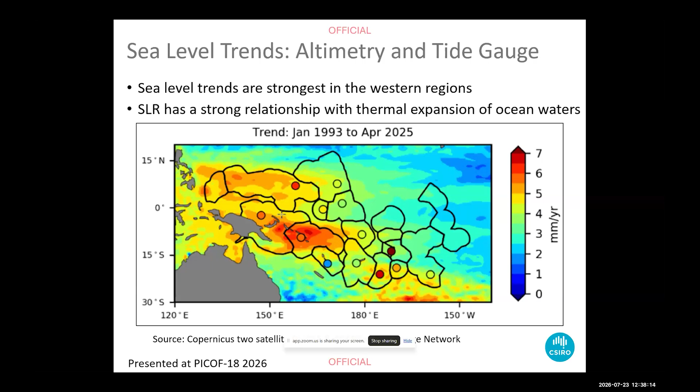So this plot shows the trend from 1993 through to 2025. The dark boundary layers are each country's exclusive economic zones. The shaded map in the background shows the altimetry, and the dots within each of these EEZs show the tide gauge recording. The red colour indicates the highest rate of sea level rise in millimetres per year across this time frame. You'll see in some of the countries, the tide gauge is measuring a different rate than what the satellite is measuring, and I'll explain that in the next slide.

One of the factors you need to consider in the Pacific is not all the land is vertically stable. Some is moving up or some is moving down. You can see where the tide gauge and altimetry do align, for example, the Marshall Islands at the top, it's because the land is stable. It hasn't moved up and down overall over that period of time, 1993 to 2025.

If you look at Samoa, however, there's been a big vertical downward shift in Samoa, which has exacerbated the sea level rise. And in contrast, Vanuatu has been moving up, and that has made the sea level rise appear less by their tide gauge. So when you're looking at sea level rise in the Pacific, it's good to consider all sorts of things that will affect how much the sea may impact on the land.

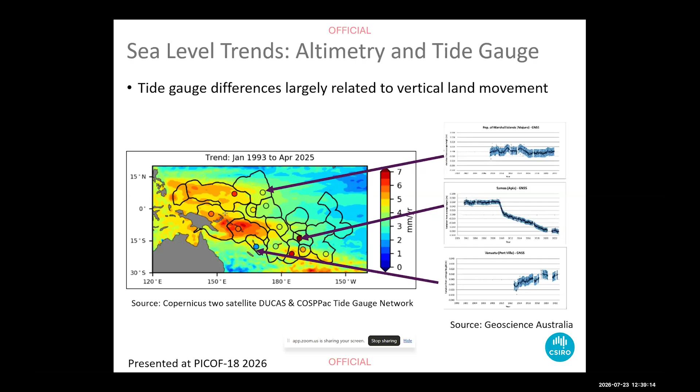Looking into the future, we've got to consider some uncertainties. There's three sources of uncertainty. The first being the future greenhouse gas and aerosol pathways, which could range from low right through to high. There's also the regional climate responses, or the model responses to these pathways, some models being more sensitive to the change in composition of the atmosphere than others. And ongoing natural climate variability will occur into the future, so that is also considered in the future modelling of sea level projections.

All right, so I'm introducing here these elements called shared socioeconomic pathways, known as SSPs. You can see the high SSP5-8.5 follows this faster increasing rate of CO2. With SSP1-2.6, we call a low scenario, there's a decline in greenhouse gas concentrations into the future.

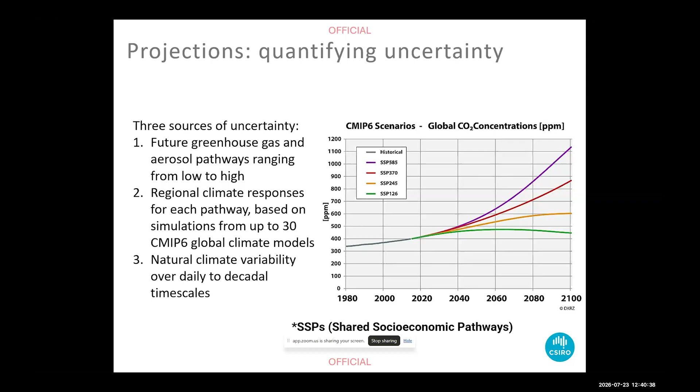So remember these, because in all of the follow-up, I'm going to be discussing SSPs. So the high is 585, the low is 126. Oh, 226 in this case.

So this here shows the IPCC projections of global sea level rise out to the year 2100. And here you can see two pathways out into the future. The pink band shows the SSP 585 trajectory of sea level rise in centimetres, right? So you can see for 585, depending on the model, which shows that range of the pink coloration, it could be up to or more than a metre globally into the future, but the median showing around about 80 centimetres. That's the median of all the models.

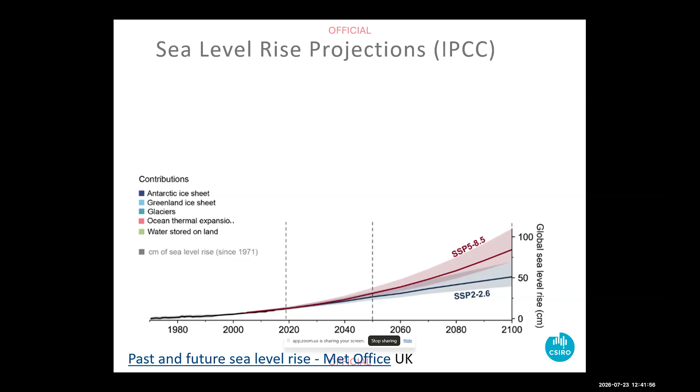Whereas the lower trajectory of greenhouse gases, of course, causes lower sea level rise into the future. Now, what contributes to sea level rise is a lot of factors, including both Antarctic and Greenland ice sheet melting, glaciers melting, thermal expansion of the oceans, and also water stored on land coming out of the land and into the sea. And here you can see the contributions for the different timeframes, including the current timeframe, and which of these factors contributes most to the sea level rises.

And what you'll see is the largest contribution is from thermal expansion of the ocean. So that means that seas are getting warmer, and that causes sea levels to rise. But there are other contributions. So you can see that overall, the main contribution, no matter which trajectory or which time frame, is the thermal expansion. But notice by 2050, the scenario doesn't matter too much. You can see even in the median of the scenario, sea level rises. There's not a big difference. It's the difference in scenario that matters a lot by the end of the century, where of course the higher emissions has much greater impact.

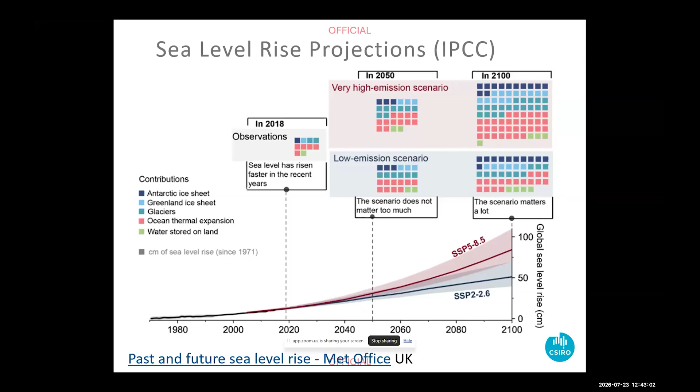All right. The other point I'd like to make is that the rise in sea level is not like bath water. It's not even everywhere. There's some parts of the globe, and this comes from the IPCC Interactive Atlas. Anyone can go into this atlas and have a look. All right. Here I've selected a reasonably high SSP. So we'll consider the high SSP, 3-7.0 rather than 8.5. And this is by the end of the century, but you can have a look at all stages into the future if you wish to explore this sort of information.

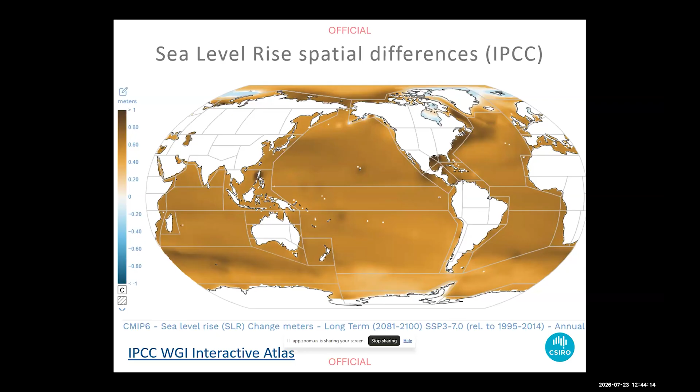But notice that some parts of the globe tend to have a much higher level of sea level rise by the end of the century than other parts. Okay, it's quite a dynamic science that does these estimations. If you like to make an eyeball average, you could probably say that the Pacific region tends to be in that average of the whole global sea level rise outlook. But there is another tool, a really interesting tool that has been developed by NASA. And this actually doesn't measure sea level rise, it measures sea level change because it factors in the vertical land movement. So it's quite a helpful tool.

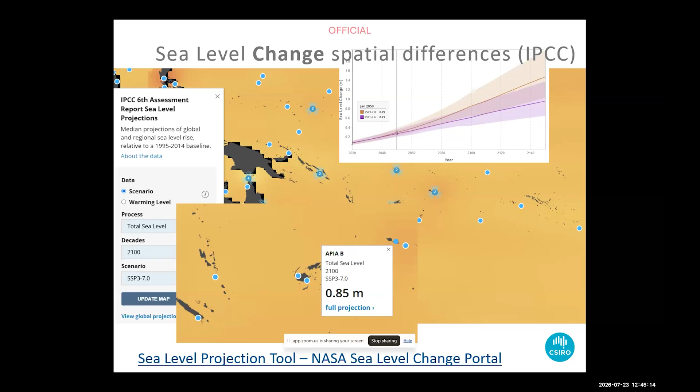And what you can do if you're in the Pacific or anywhere in the globe, you can actually click on any of these dots. For example, I've picked Samoa here. And you can get the full projection of sea level in this kind of time frame. Here I've just picked the low and the high emission scenarios. This data is also available tabulated, so any engineers can grab this data. And here I've dialed to January 2050. These are the different median results. So it's quite an interesting tool to use, especially for engineers, I think.

This low confidence is what people might be talking about when they talk about the climate change tipping points. For example, things happen with Antarctic ice sheets faster than expected, and that is factored into these scenarios. It's low confidence because the science is still evolving in looking at ice sheets and how they will evolve into the future. But it's sometimes a factor that engineers might have to consider when they're planning and designing, especially some very long-lived assets. So it's something that you can consider, but something you have to consider with a bit of caution.

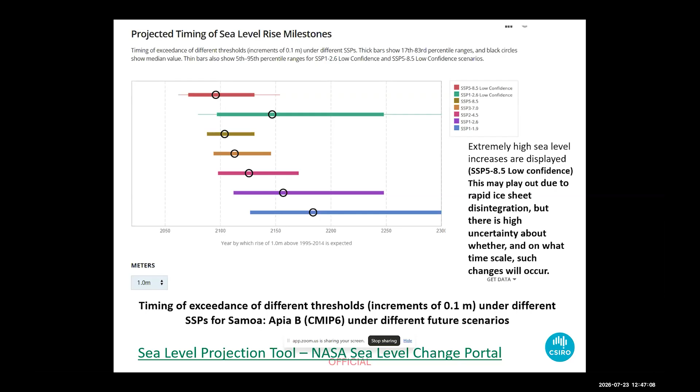Okay. So let's talk about extreme sea levels. That was just sea levels, all right? But what causes extreme levels is there's also other contributions, and engineers would definitely take this into account. For example, tides, the interannual sea level variability, and ENSO is a big factor in the Pacific because that's exactly where that warm water is shifting around. So where the warm water shifts in these ENSO phases has, of course, got higher sea levels. All right, so that's a factor.

There's also storm surge and then the waves that occur, for example, with tropical cyclones, right? And also coastlines and the run up and the shape of these coasts are also important to consider. Noting that, as people will probably be aware, not all extreme sea levels occur, because, for example, a tropical cyclone might occur just by chance when it's not high tide. So while there's a TC, maybe that doesn't cause an extreme sea level event.

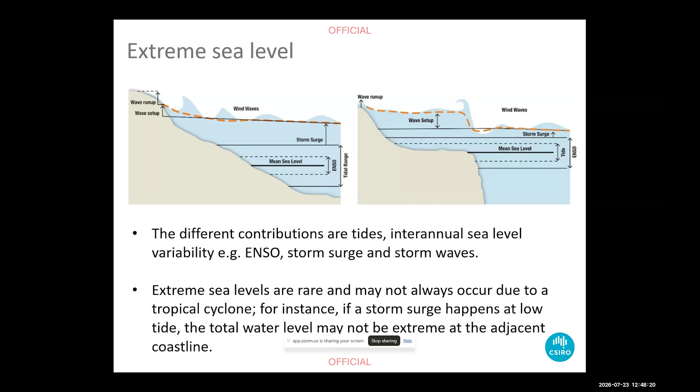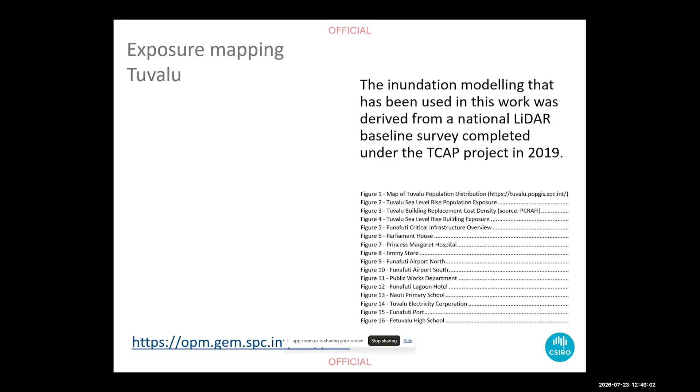Just a couple of examples to finish. We recently did some work in Tuvalu, which is very exposed to sea level rise given its low-lying nature. Here in this Tuvalu work, there's been some inundation modelling undertaken by the TCAP project. You can see on this there's a web link for that where you can get some information. That was the LiDAR modelling, but we developed that further and had a look at different things like population exposure, the cost of different exposures at different times, and also picked out a few important buildings in Tuvalu. And here's an example of the Parliament House. You see in that list there's all sorts of buildings that we've done this kind of modelling for.

I think people might be familiar with return periods. What return periods means is how frequently an event will occur. So if it's a 5-year return period, that means it's reasonably frequent. These kind of events occur every 5 years. Compared to, for example, a 100-year return period, they're rarer. They only occur about once every 100 years statistically.

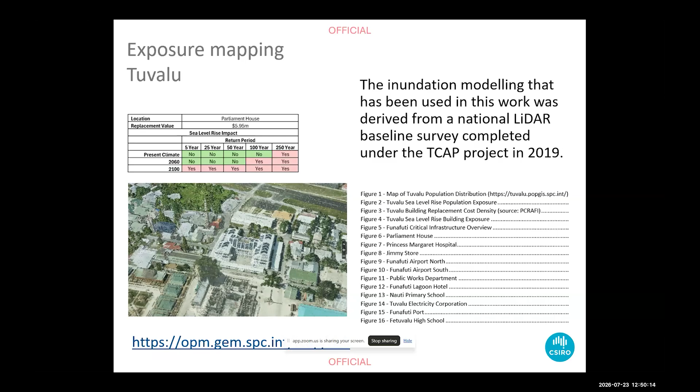And you can see here, for example, this Parliament House: in the current climate, storms that occur once every 5 years will not impact Parliament House. But by the end of the century, even the 5-year return periods will impact Parliament House. So we would consider that well exposed at the end of the century. And this is under the middle SSP2-4.5 scenario. This sort of work's being done all the time in many of the Pacific Island countries.

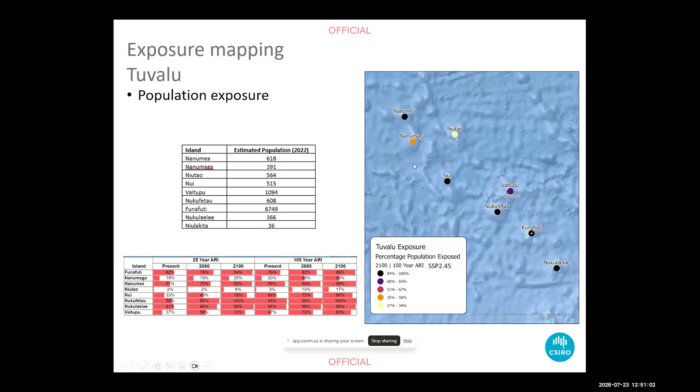This is also for Tuvalu showing population exposure on different islands in the archipelago. You can see all the different islands, this is SSP2-4.5, by the end of the century, this column, the 1 in 100-year return interval. So by the end of the century, under middle climate emissions, some islands in Tuvalu are more exposed than others. Niutao, I don't know how to pronounce that, is less exposed, for example, than other islands in that chain of islands making up Tuvalu.

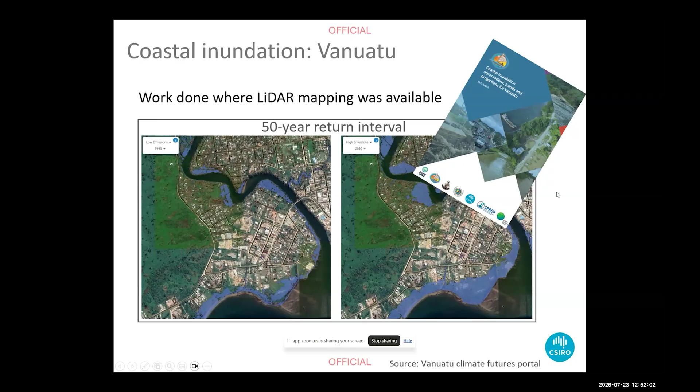Another really interesting project undertaken recently in Vanuatu is some LiDAR mapping that shows exposure of roads in Vanuatu. In this space, frequency of storms is how we describe how dangerous they are. So this is a 1 in 50-year storm, and how and where it will inundate the coast under current climate versus high emissions by the end of the century. This kind of mapping is now being developed for Vanuatu, and they're using it to start planning their roads for the future. All of these have been reported in some really accessible documents available on the Vanuatu Climate Futures portal. Thank you very much.

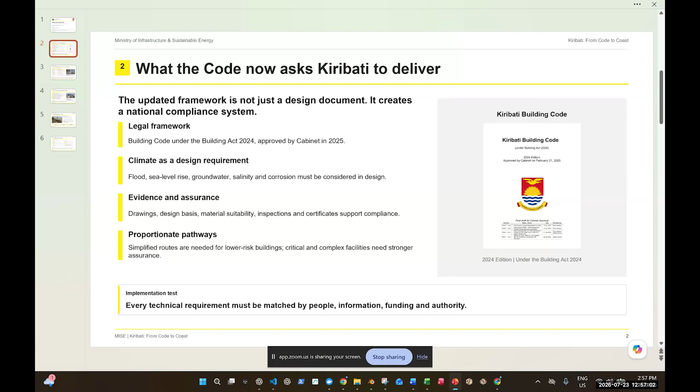Like I said, when you're working in the international development space, the governments, the local construction market, the local engineers, there's a heavy dependence on experts coming in to deliver the work. So the quality of the work has to happen. And if it's not there, we don't get the quality outcomes. We don't have properly built seawalls, bridges, roads. We're looking at baseline data such as flood levels, and structural designs as well. There's a heavy reliance on international development partners to supply that.

Currently in our ministry, there's a limited number of certified practicing engineers or fully qualified experts who can support. So that dependency once again hinges on what development partners can provide, and that ultimately also affects sustainability. It comes back to the reliance on international development partners.

Material suitability in Kiribati is a massive thing for us. One of the key challenges we have on the ground to build sustainable infrastructure is aggregate. I know there are studies that have been done around aggregate. We have one company here that provides it. However, there's a high salt content in there.

And so when you're going to mix it with concrete and applying it on the site, it doesn't last. We have one classic example in one of the towns, Bairiki. The building was built, however, it wasn't monitored properly. It was a three-story building that ANZ were in. Now, because of the salt, the corrosion on the steel, it's no longer viable. People, they've all moved out.

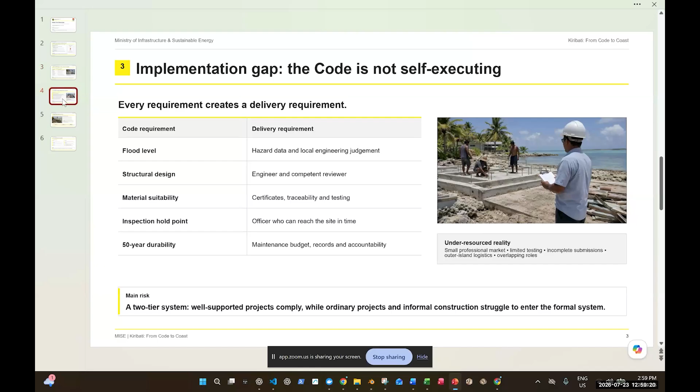The cost and feasibility, once again, there's a heavy reliance on us to actually go find funding. So we'll have these designs that we really need. For example, solid causeways. However, once again, it comes back to aggregate. We need to import most of the materials, probably 90%. If you think about where our material costs come from, it comes from Australia, New Zealand, it's already at a high price. Then we have to pay for shipping, pay for import costs as well, clearance costs. So it all starts to add up.

This is exacerbated when we have to go to an outer island. So the first port has to come to South Tarawa. If we've got a project in, say, Butaritari or another outer island, there are further costs that are involved where we've got to ship it over there. And so you can see that building quality starts to build up the price. And so for a government, it's not feasible to deliver. Hence, again, the heavy reliance on international development partners and trying to make it work.

When you're forced to build under these conditions, it is a challenge and a half. And every day we battle these things to try and figure out what's best, what do we drop off, how do we slowly change the hearts and the minds of the people to understand that we are trying to build something quality whilst making it affordable.

One of the key things that I forgot to mention earlier was our Building Act specifically states that the Act and the Code only applies to South Tarawa and Christmas Island, for the sheer fact that that's the massive economic hub. And that's where a lot of the companies and people, that's where the money's at, so they can afford it. All the outer islands don't rely on that. However, there are some plans in place to implement building manuals to support the outer islands that don't fall under the Act.

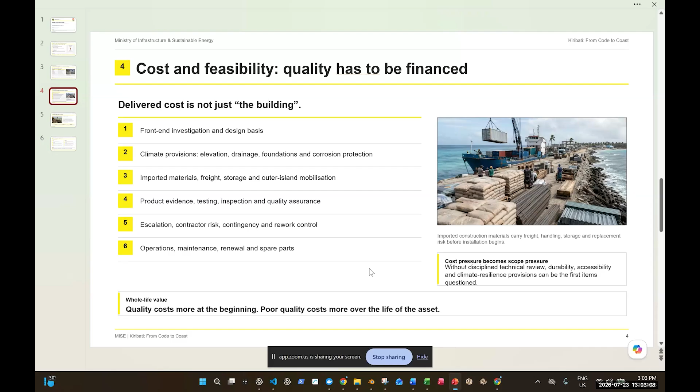Then the next question we get back is, all right, do you guys have a maintenance plan for the bridge? Do you have a maintenance plan for the causeway? Do you have sinking funds allocated? Is there a policy or a financial policy that allows for this to happen? And the answer is no, we're working on it. So trying to catch up while delivering quality infrastructure is one of our challenges there.

A couple more slides, won't be too much longer.

So generic standards is not enough. The resilience is in the details. One of the key things we have is if we've got the science telling us that we need to build higher or change the way we do things, the code comes into place, but it's not the code that actually builds, it's people. And one of the key things is engineering on the coast, like looking at these elements here.

Yeah, they're all from the code, but having the team that have the expertise, experience, having contractors that have the experience and the financial capacity to meet those demands is difficult to find here in Kiribati, and I dare say in a lot of other small island developing states. Our processes internally to ensure that they're fit for purpose also have an impact. We have a team on the ground who are learning, they're great, but experience once again is limited, and having the capacity to go out and inspect, to have them understand what they're looking at is a challenge.

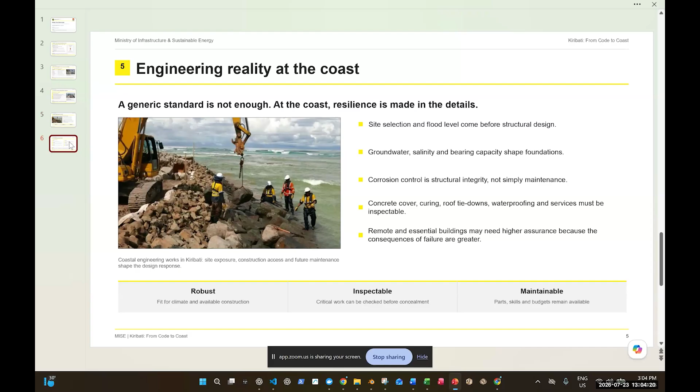So there's some good news, don't worry, I'll come back with that one. So my last slide I'll share is just from publication to protection. Looking to clarify the roles internally. So how are we going to shape this? Clarifying what each department has to do, what each ministry has to do. We're currently finding our feet. There are laws in place, there are role delineation policies and whatnot, but it's still unclear.

And that sort of confusion internally affects how contractors engage with our ministry, how they engage with other ministries. Like a lot of Pacific Island countries I've worked in, it's not a straightforward build. You have to go through multiple ministries, through different sub-departments to try and get the job done. And it can be a challenge when it's not clear.

We're looking at simplifying it by using the building manuals. PRIF and World Bank are fortunate enough to be funding that next phase of our implementation plan. So we'll be doing building manuals for the outer islands, but trying to incorporate and teaching families that, hey, this here is to ensure that your buildings, your homes will last longer. You know, at the end of the day, it's their choice. How do we convince them that that's better for them?

When, you know, the cost may be, say, 100K versus, oh, they can do it with local cheap materials for like 20K. And so these are some of the considerations you have to make when we're talking about policy. When you're trying to implement the code, that cultural currency is vital, because we can talk about policy, we can talk about the science behind things till we're blue in the face. But in the Pacific, there's a very, very important factor, and that is cultural currency, because if you do not know how to navigate that, it'll be difficult for you to affect positive change.

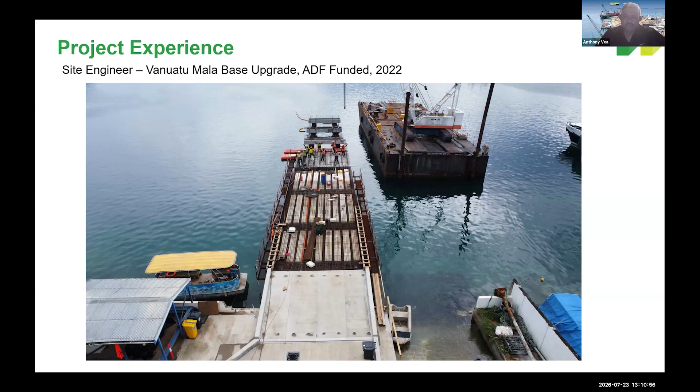After my little stint in Vanuatu, I moved on to the Queen Salote Wharf upgrade as a site engineer, going to senior site engineer. This one was a personal one for me, having been from Tonga originally and then moving to study in New Zealand and then being able to make my way back to build this modernized, resilient structure that's basically Tonga's lifeline, responsible for over 90% of Tonga's imports and exports, was a true blessing.

It's also a key evacuation route out of the main town area over to the bush areas, which are higher in elevation. It's quite funny on this. I believe the reason this was fast-tracked was because in the 2022 tsunami evacuation, the prime minister at the time was stuck in traffic trying to leave town. Just why I believe we are building this right now.

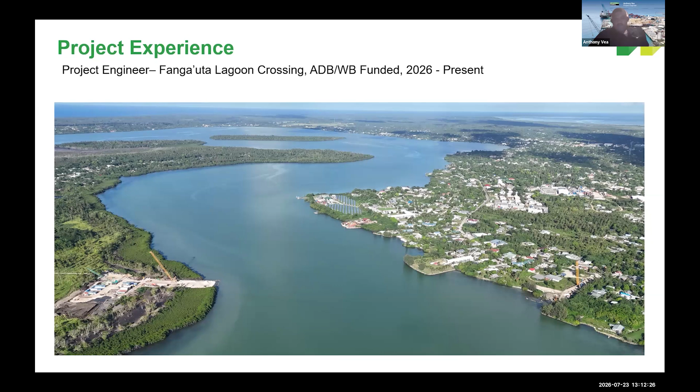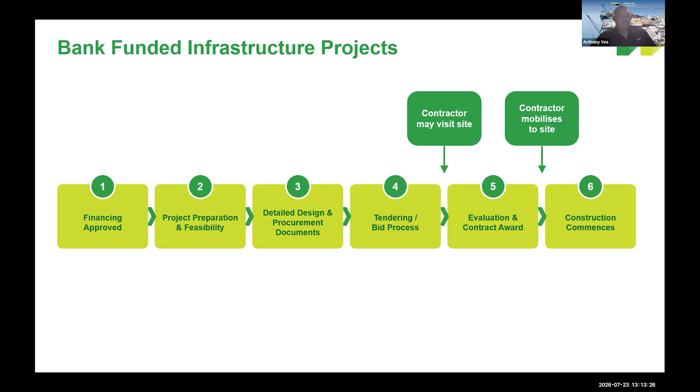And then finally, construction commences, the contractor mobilizes to site. I just bring this up because you see later on in the stage is when the contractors come to site and when delivery is required. So there are issues that we have to deal with very quickly.

Design solution to deal with sea level rise. I think everyone knows we just make taller structures. Sea level rises, make taller structures. The points I want to discuss today from the contractor's point of view is the survey control. So sea level rise results in an increase in mean sea level. How is this translated to the country's survey control?

Tie-in, confirm on site. Probably a contractor's least favorite thing to see on the drawing is a statement that says confirm on site, because it means that there are some design elements that haven't been finalized yet. So we need to confirm it on site when we're there working together with the designer. So when you design all new structures to be higher in elevation to account for the sea level rise, you have to tie it into existing structures because there are limits financially to how much you can build in a project. And then the height versus cost scenario.

So the cost of building structures taller increases due to the methodology required to construct. So if you have a design life of a wharf that's say 25 years, you have to deal with an incremental rise in sea level. Whereas if you deal with a design that's 100 years design life, then you have to deal with a larger sea level rise, which means you'll likely be designing a taller structure.

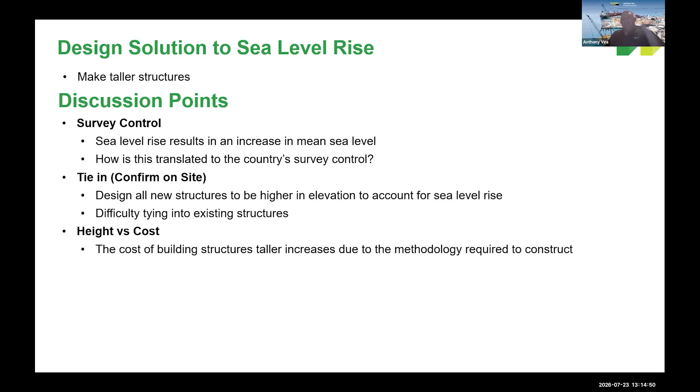So, survey control. This TON1 benchmark is a control point just south of the Queen Salote Wharf, which we used on the project as the main benchmark for our survey works. This TON1 benchmark isn't just a local benchmark, it's actually part of the wider Pacific Sea Level Monitoring Network and has immense value for sea level climate change worldwide. Our elevation was based on MSL, so mean sea level. So a 0-meter MSL meant that that was mean sea level at that time.

We moved on to the Fanga'uta Lagoon crossing, and we received this tide table as part of the design documents, which reference a different datum, tide gauge 0. It had a different mean sea level value, 1.042 meters. So after dealing with all of this at Queen Salote and then coming to deal with this at Fanga'uta Lagoon Bridge, we decided it would be best to translate this datum here to the TON1, which is a significant benchmark that's used all over the South Pacific.

What we learned from this translation is that there was a 92 mil difference in mean sea level from the Fanga'uta Lagoon crossing tide levels and the Queen Salote tide levels. So we made an adjustment and went with a more conservative approach, which resulted in a 92 mil increase in all elevations, including the bridge and roads, which could add significant costs to a project. So with all the value engineering proposals, we worked together with designers and the government of Tonga to come up with a solution that works.

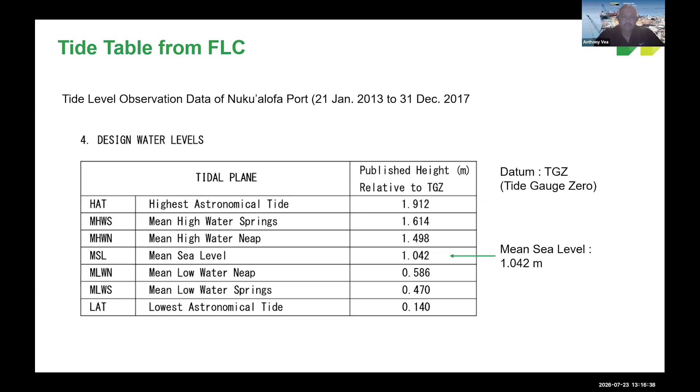Next, as I mentioned, the tie-in and confirm on-site scenario. So this is the Queen Salote Wharf, which we had just worked on. Down on the southern side of the wharf is this red line, which is the extent of the Queen Salote Wharf project, tying into the existing structures. Up by the gatehouse entrance here, they accounted for the steep slope and change in elevation by running a table drain across the gatehouse here.

Further down to the southwest corner here, where we had just tied into the existing level, there's a steep change in elevation here. So there's major surface water runoff, which goes into the existing pavement. Sometimes the existing infrastructure cannot handle this type of change. So this area floods if there is a major rain event, and then eventually disappears. But I would say in the next run of funding, when Tonga is able to extend their wharf projects, they can deal with these issues.

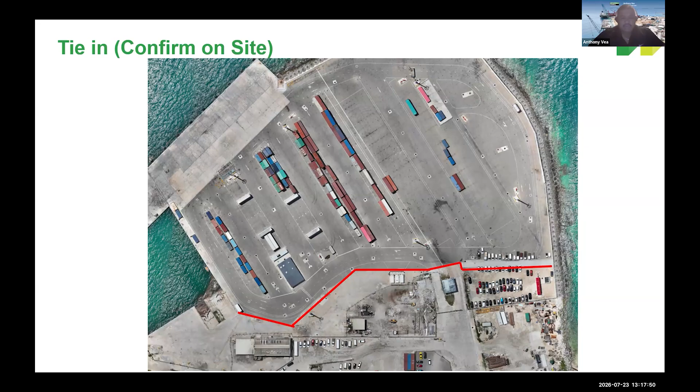In another scenario where we're going to the Fanga'uta Lagoon crossing, its height accounts for sea level rise and a bunch of other things, but just to touch on the sea level rise, the top of headstock is 4 meters above water level, which then requires a significant temporary works procedure and temporary works fabrication to be able to construct these headstocks. So you can see that it's not just the materials that you're dealing with, it's the construction methodology and the cost of the temporary works that will skyrocket the price to build these items. Those are the main 3 points I wanted to talk about on the contractor's perspective.

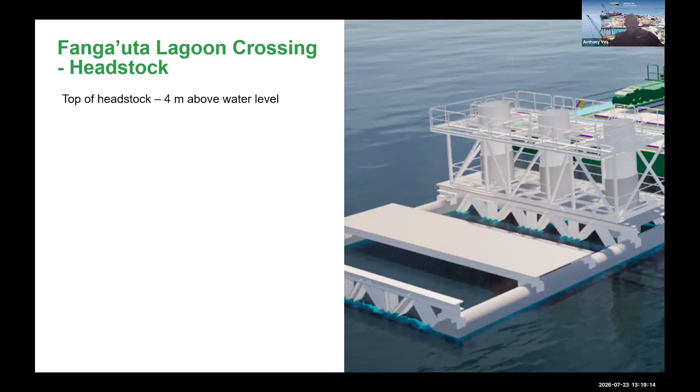I also wanted to touch on how we, McConnell Dowell, approached the project with Queen Salote Wharf. We came into Tonga in 2022. Luckily for me, I was coming home, so I was able to get in touch with everyone and set up contacts, but we were able to develop a workforce. So we direct hired all our employees to work directly for McConnell Dowell. We identified local partners to support deliveries. So that's quarries. We had 3 or 4 quarries work for us and deliver aggregates for the batch plant and all materials required for construction.

We worked with the local community, building. When there was flooding, we put out all our additional pallets to create a walkway for all the children to get to their class from the parking lot. And then we live, work, and play in Nuku'alofa. So we use the expats that come to Tonga and work there. We participate by going to the local rugby games. We use the local facilities for leisure, like playing basketball, that fun stuff.

Training of the local workforce. So at the end of 2025, we had over 3,000 training hours. And for the high-risk construction activities, we had certified trainers come from New Zealand to carry out this training. What this does is it gave certifications for all our workers so that once they move on from McConnell Dowell and go to work in New Zealand or Australia, they know that these certifications are still valid in those countries.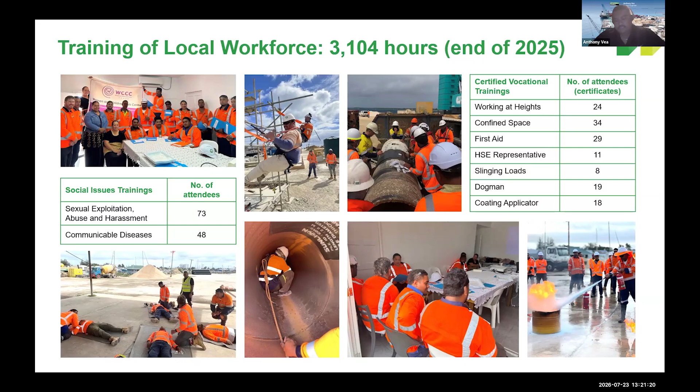That was excellent. It's interesting that you raised the point that perhaps I hadn't considered before, that the rising sea level does impact on the base level that's adopted, and will continue, I guess.

So we'll move on to our 4th speaker, who is Scott Keane. This time I will introduce Scott. He has a long experience in the port and marine sector in the Pacific and Australia. He is market leader, ports and maritime, for the major international consultant Stantec. And I have to acknowledge that I worked together with Scott for many years in Cardno. Scott is also the International Vice President and Maritime Commission member of the World Association for Waterborne Transport Infrastructure, PIANC is the acronym. So he has a strong connection internationally there. Scott's subject is engineering infrastructure to account for sea level rise. So over to you, Scott.

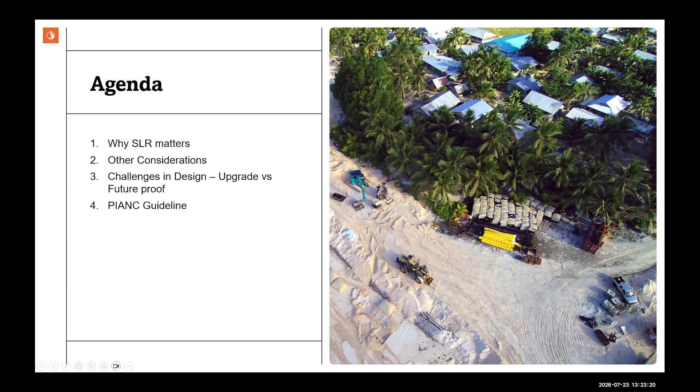I have a lot of slides, but I'll be moving through them fairly quickly. Unfortunately, being the last speaker, lots of people have covered things that I was going to speak about, so I can flick through pretty quickly. I will talk very briefly about why SLR matters, and that's been discussed by several other speakers already. Some other considerations, and then particularly around future proofing.

So, why does it matter? We've already heard about infrastructure in the Pacific being a lifeline, and that's quite clear to everyone. We know that sea levels are impacting community areas, crops, water supplies, and everything. And I have seen that firsthand, as have a number of other speakers today. There's also the fact that erosion and wave impacts are affecting structures beyond what the design intents were, and changing sediment transport and recovery mechanisms on islands that are having significant impacts on livelihoods, access to transportation, and other things.

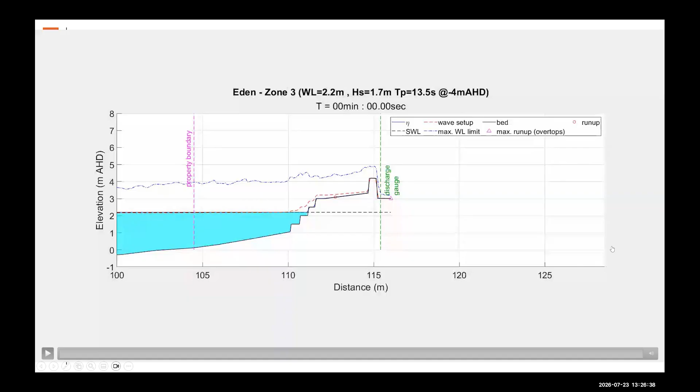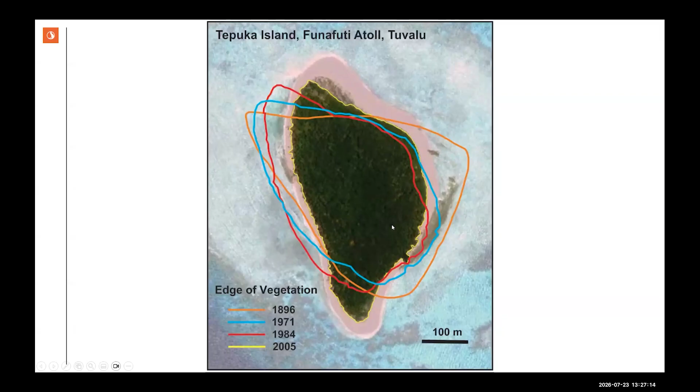I mentioned previously about the challenges of shoreline change and sediment transport. So this shows quite clearly and quite nicely over a long period of time the substantial changes that happen to the vegetation line on a small atoll in Tuvalu. But nonetheless, if you've got infrastructure on that island, you've got to actually think about how that impacts over time and how you try and future-proof that. But also how you protect the communities that are actually living in those locations.

So some of the issues that have been talked about by people already, funding, obviously. We have real problems throughout the Pacific. So some of these locations, very small island communities, small number of people that benefit from this, but nonetheless, it is transformative and it's all about sustaining life in a lot of cases. People have talked already about local capacity to build or maintain these assets and the local materials.

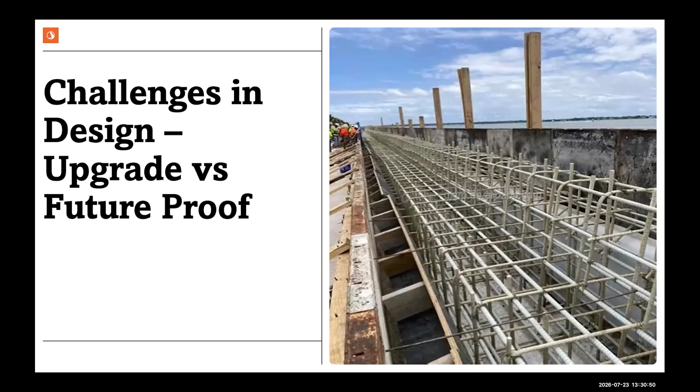But again, this photo on this slide just shows that's GRP reinforcing, so fantastic because it doesn't corrode. It's not always practical in the Pacific because of seismicity. We've done projects in the past that use stainless steel reinforcing, for example, but when you're talking about 4 or 5 times the cost of normal reinforcing, it adds a substantial cost to your project. So some of the challenges that we have in design versus future proofing.

So climate change is fantastic from a port engineering perspective because you don't need to do as much dredging, but it's not so good in many other aspects. So as I mentioned before, possibly greater sediment transport, existing wharf uplift or overtopping. So when you've got sea level rise and you've got wave action underneath the structure, that can cause massive issues. And perhaps the structure hasn't been designed for uplift of the structure or the piles, for example.

Maintainability, the berthing loads, and in the Pacific, seismicity. So you go for heavier structures or lift deck height and add extra load to it. That may make it more prone to seismic failure in a seismic event. We have things like nav aids that are relied upon by the communities to find their way home between islands. And that might mean that the light is now closer to the sea level or impacted by wave action, so people can't actually see it.

Coastal defense, so I mentioned that before, it may not be practical to build higher because that on a normal revetment builds out further. So you might actually have levels that drop off a reef or something else. So you need to then think about seawalls and engineering them to withstand massive wave loads.

Erosion and sediment budgets. So some of these locations are being impacted over time by erosion that then impacts on the local communities and the very land that they actually exist on. So if that is the case, we need to look at reinforcing those areas, adding more sand into those environments or rock to protect it so that there is material in case it erodes in future.

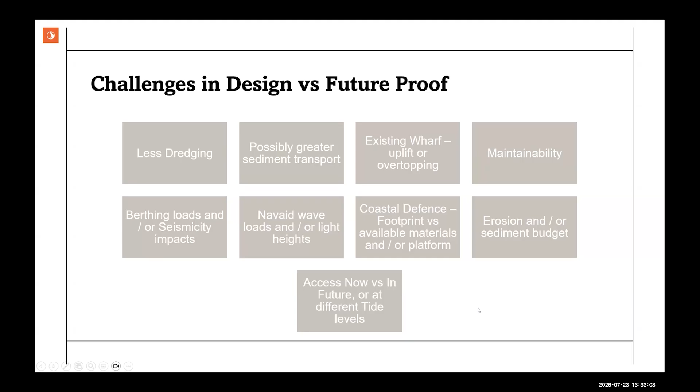We've had cases anywhere up to, and particularly when you add seismicity and other things to it, you could be dealing with 25% change in capacity, and that's massive in terms of whether you allow for it now or into the future.

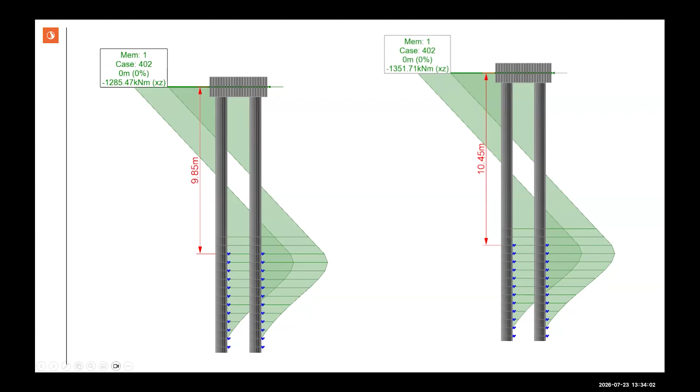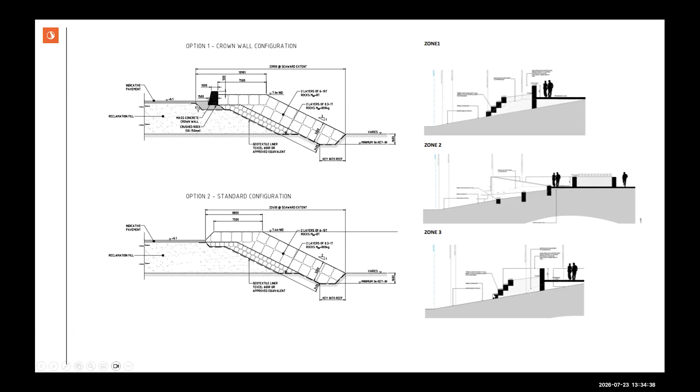Similarly, I talked about revetment. So you may be able to build up and out further. So if you had to increase your height, build up higher, that pushes your toe of your seawall out further. That might be possible in some cases, but it may not. It may be across sensitive areas, fishing grounds, whatever else, or off the edge of a reef, in which case you've got to design a seawall. Or it might be a combination of factors. So a combination of revetments, seawalls, wave dissipation devices, a range of different scenarios that you might have to consider.

So if we're thinking about sea level rise, as I said before, it could be the piles, it could be the deck. You need to think about how you hold those down, whether the piles have been designed for it, or it could be for overtopping, so significant wave action on top of a deck, and whether that actually does other damage and design actions that you need to consider.

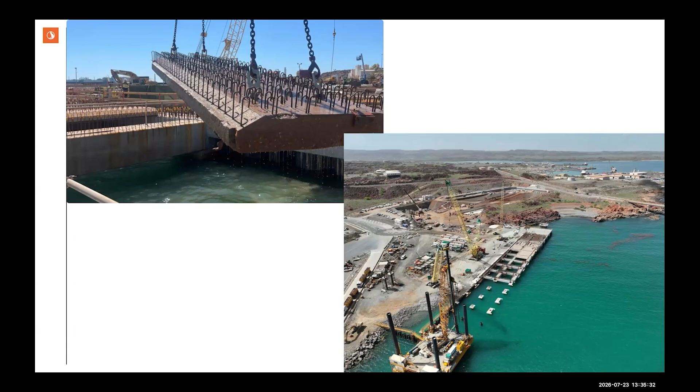This was a very simple design, for example, that thought about your ultimate deck heights, so design vessels at low water and at high water in a current scenario, but then also for a sea level rise scenario. So in the sea level rise scenario, you can see that you can actually still access, and it's still functional, but unfortunately it may not be all that practical in the meantime for people, particularly the elderly, infirm and the like, to actually get on and off vessels. It's okay if it's cargo vessels.

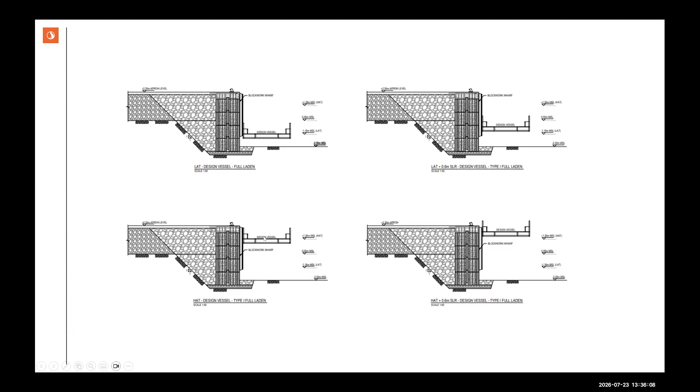There's another project, similar sort of arrangement, but again, it's a major structure with a stepped profile, so that at different stages of tide, vessels could come alongside, tie up, and people get on and off, or with cargo on and off. That's a little bit simpler, particularly for those school kids or the elderly, infirm, pregnant women, all those sorts of things that we have to consider throughout the Pacific, right?

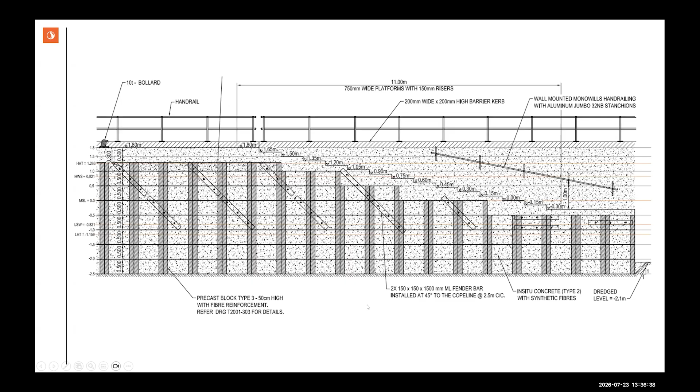So this was a project in Tokelau, for example, very similar sort of arrangement. So providing some protection to the channel, so you stop some of that coastal accretion and the sand accumulating so it's maintainable. Different areas to protect from wave action coming down the channel, and then different aspects of the wharf for either cargo vessels or smaller local vessels and things like that.

So a lot of thinking. It looks like a really simple structure, but a lot of thinking has to go into it to not only come up with a practical outcome, but also cost effective and long-term sustainability.

Dick mentioned PIANC. So for those that don't know, PIANC is the World Association for Waterborne Transport Infrastructure. So what does that mean? It means that we have a number of commissions, we call them, people that come up with design standards. So our Environment Commission looks at environmental aspects, but also has a task group on climate change.

The Maritime Commission that I am involved in directly comes up with maritime guidelines and standards for construction. We have an inland waterways one, which doesn't mean much to anybody in the Pacific or Australia. And we also have a cooperation commission that looks at developing countries and how we benefit and share knowledge with developing countries.

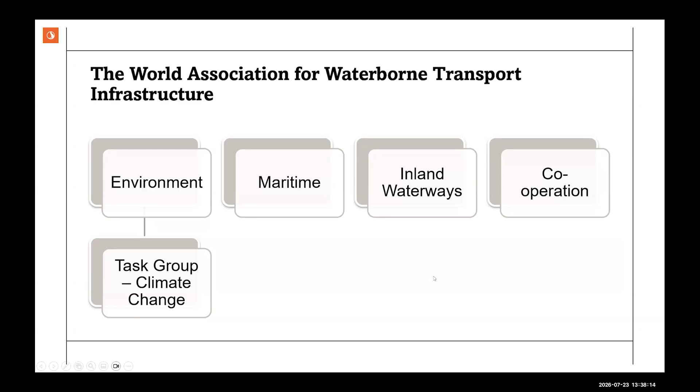But what this document does do is go into SDG goals around climate change. It talks about climate change impacts and adaptation, and then the concept of design and actually how you build in all of those aspects. So it's a really important document. There's Pacific examples. There's examples from other ocean developing country island states. But the Pacific was the largest contributor to this particular document. So thank you, and happy to take questions.

Thanks, Dick. Well, thank you very much, Scott. That was a very comprehensive introduction into engineering for climate change. Now we have a few minutes for questions. I should have reminded you all before to pose your questions on the Q&A, and you may still do that.

We have one there at the moment from Joshi, for Leanne, who thanks Leanne for the presentation. The question is about return periods due to climate change. There are uncertainties about return period forecasts. I just wanted to know, in terms of modelling, how we are allocating percentage for such uncertainties and potential impacts. And Leanne, you might address that.